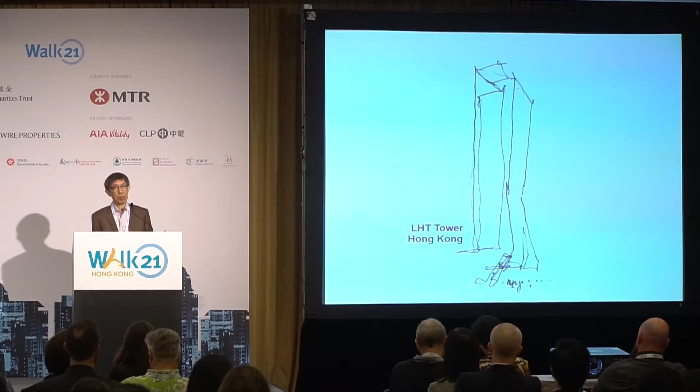One of the simplest ways architecture can engage the walker is just to provide the interface between the private realm, something the architecture contains, and the public realm, something which flanks the architecture, like a street.

In this project, the LHT Tower in Central, it flanks one of the only pedestrianized streets in Hong Kong, Theatre Lane, along here. So what we do is design a facade which is dynamic and engaging, so that from different directions and alleyways, it draws you in.

And when you walk alongside it, the apparent movements and dynamics of the facade actually help you move along. At the same time, it's transparent—you can look at it, through it, to see the lobbies, cafes, and shops on the inside. And it leads you to an entrance which is seamlessly connected to the sidewalk.

So that is a simple example. But architecture could be much more proactive than that.

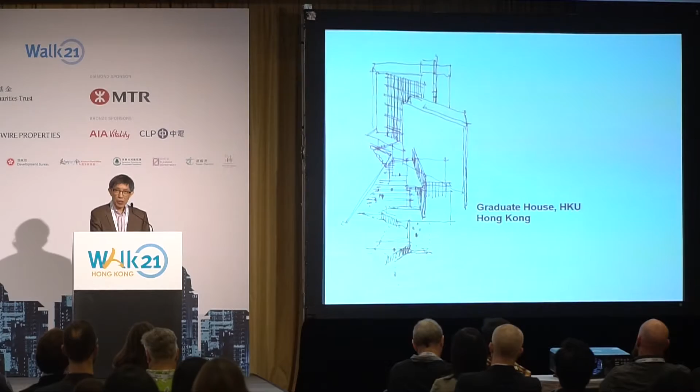A building we designed almost 20 years ago at the University of Hong Kong, in which we actually merge the public realm with the private realm, so that as you walk, you experience the building.

This is the campus of the University of Hong Kong, again a very compact fabric, almost like our city. The building is located there. It's on the route between the residential hostels of graduate students and the senior staff, with the center of the campus down the slope.

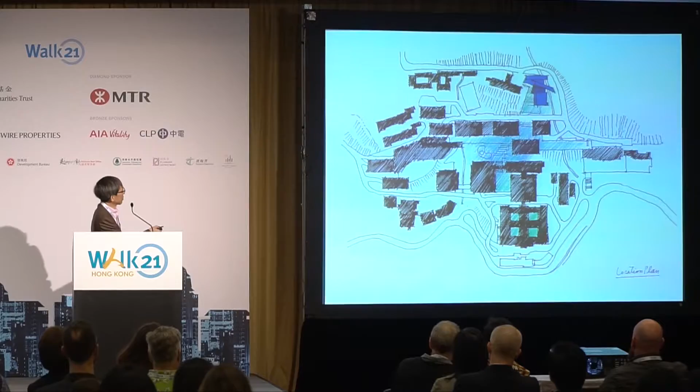So that's the building, the residential quarters of the upper slopes. What we do is bring the routes of the daily commuters from those residences alongside the building, or through the building, on the daily journey to the center of the campus.

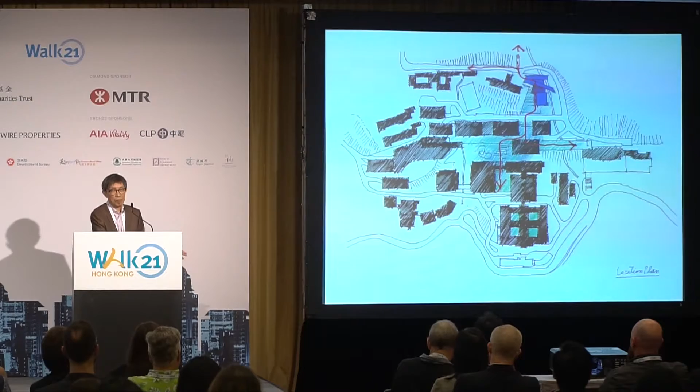That's how the building sits on the slope, with the senior staff quarters and the center of the campus. So you can either walk outside down the steps through the landscape terraces and see what's going on inside, where the podium houses conference facilities and exhibition facilities for the graduate students.

Or you could actually go in if you want, and then you see the lobby of the graduate hostel above, and going down, you see the circulation that links up all the conference facilities with a view of the greenery and the slope outside. And as you walk, you see the scenery on the outside, and people from the outside could see you walking on the inside.

As you pass along, you may come across lounges where student exhibitions might take place, or pass students coming out of lectures from the lecture halls and mingle with them. So it will be an eventful and spontaneous route as you go up and down from your residence to the centers of campus every day.

The other example is a residential building in the old district of Hong Kong. Here, the fabric is dense and vibrant.

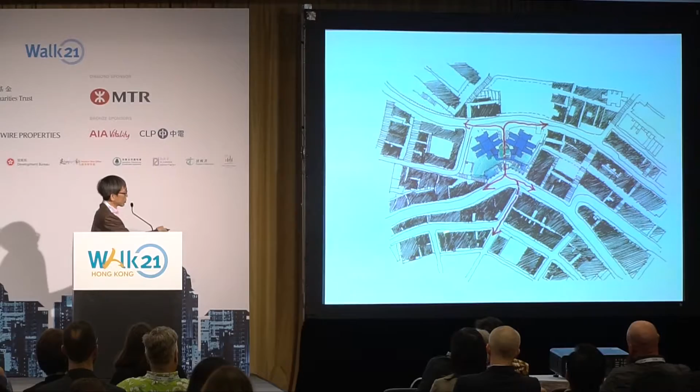So what we do is bring in, again, a route through the architecture, so that there is a journey possible for people not only in the building, but from the neighborhood to go through it to the center of the city to work. Now, this being a residential building, we can't merge the public realm with the private realm, but we intertwine it.

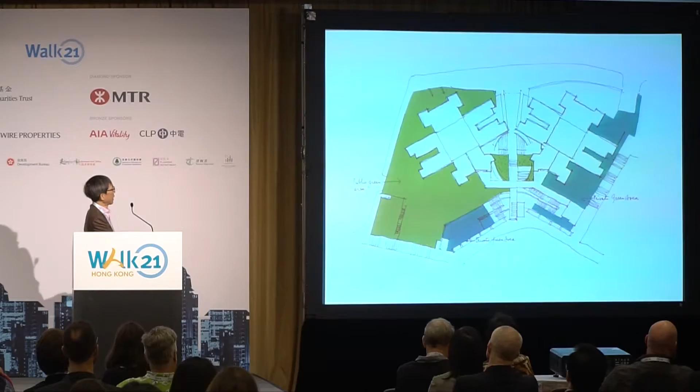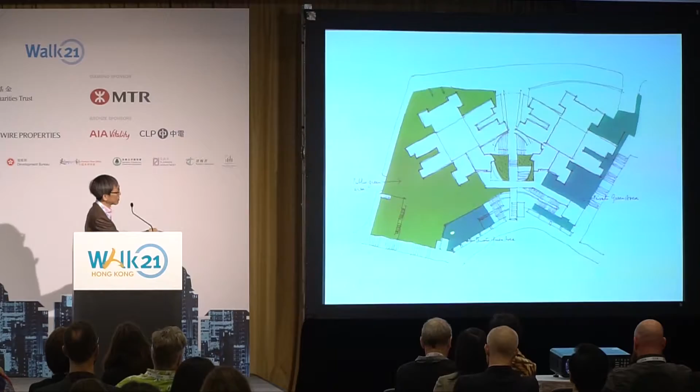And then along the way, we provide open spaces. The light green is a public park available to the residential neighborhood on the back. The dark green are the terraces and playgrounds for the residential towers, accessed through their own internal spaces.

So that is what you see as the podium beneath the two residential towers. That is the public shuttle lift that takes you up, and then through this bridge is connected directly to Hollywood Road behind. You can, of course, take the stairs, but probably you would take the stairs down rather than up. Then there will be the residential lobby and the residential shuttle lift, which is connected to another bridge above the public bridge, feeding directly into the lobbies of the two residential towers. And these are the roof terraces of the clubhouses of the residents, dispersed throughout the podium.

That's what you see looking up. So the public could wait for the lifts here, and then these are stairs that you come down, probably more than going up, as you look up. But as you walk down, or as you go up, you can actually see the city at work. And you can see the terrace, the private terrace, and these are public stairs. Along the way, you have landscaping, greenery along the routes.

And here's the uppermost bridge for the public. Coming out from the lift, you go up the steps and you go straight out to Hollywood Road behind. Above you, there's a private bridge that links up to the private shuttle lift across to the two residential lobbies. On your way, you can look down and you see the landing of the public lift and the public bridge.

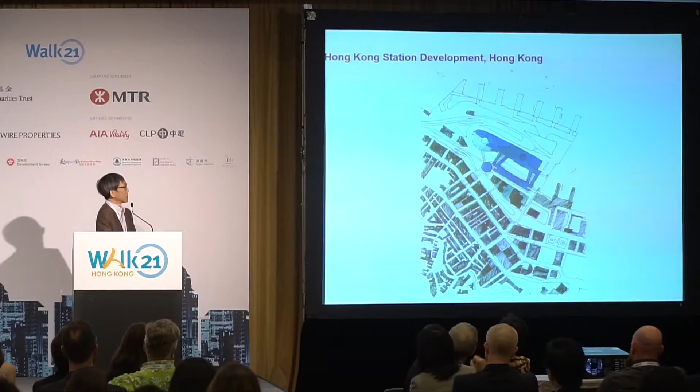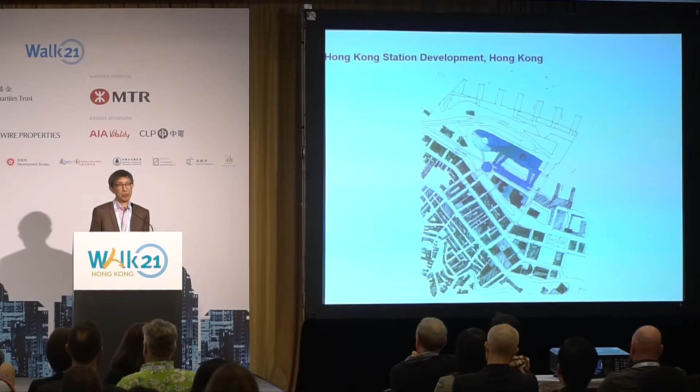IFC in Central, you probably might have heard, is a multi-directional and multi-dimensional matrix, a fusion of the public and the private, right in the heart of Central. That is a complex comprising, visually the most prominent one, IFC Tower, designed by Cesar Pelli, Four Seasons Hotel, shopping arcade, and the airport railway station, for which we are the architects. Before it's built, you can see it's actually a giant piece of a city block that has the potential of linking the south to the north, the city to the waterfront, and from the west to the east.

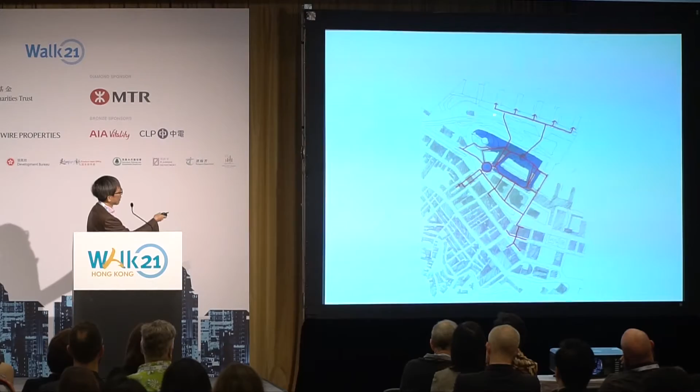The heart of the complex is a complex section of the airport railway station, the Tung Chung station, the transport interchange, the airport stations, check-in hall, the hotels and shopping arcade, the offices. But the key really is the connection of the existing network of pedestrian walkways in Central with what we bring through the complex, all the way to the waterfront, both in a south-north direction and also connecting the east-west connection in Central. So the complex is actually a continuation of the public realm, or the network of the public realm, at one level above ground.

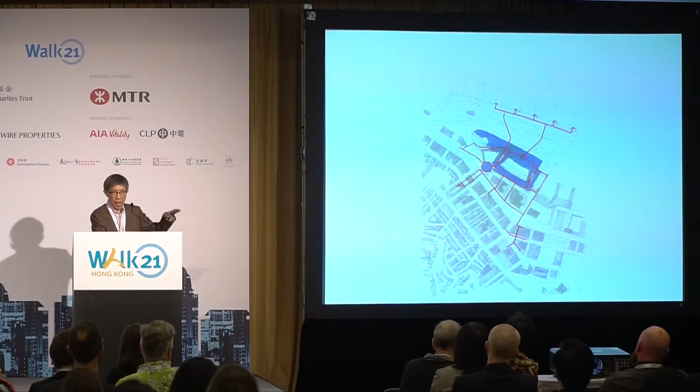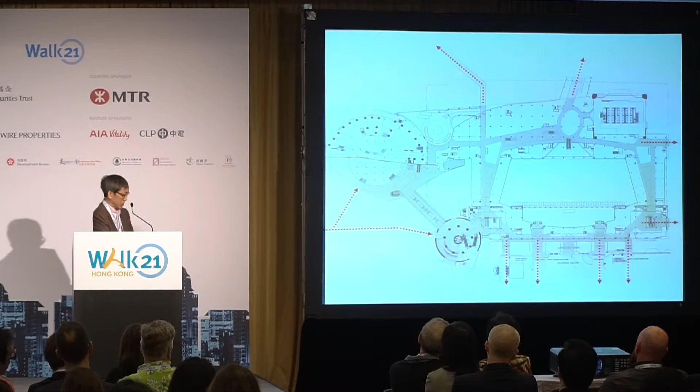That is the plan for that level. And you can see that there are all sorts of entry points and exit points, a highly permeable internal environment. From the west, you see bridges going into the shorter office tower. From the office tower, go to the hotel, Four Seasons, through landscaped roof terraces. From the ferry piers, these are the daily commuters in the morning, going through into the shopping center before going to different destinations in Central. From the south, through the different open spaces provided by Exchange Square, through pedestrian bridges, through these squares, into the inside of the pedestrian network.

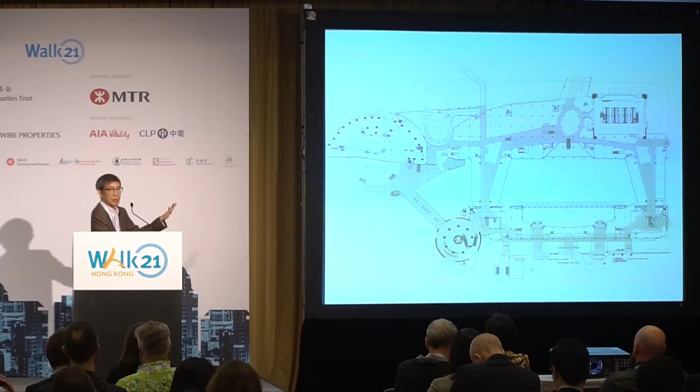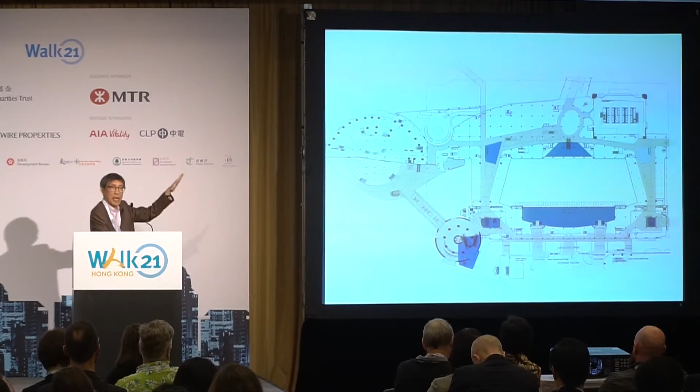Now, the inside is not just an arcade or a network for circulation. There are spaces and nodes on the inside which connect vertically to different functions that you might need to go to. For instance, there is an in-town check-in hall for checking into the airport railway station in the basement. These are the connections within the shopping arcade that bring you up to the lobby of IFC1, the low office tower, or bring you down to the local MTRC line, the Tung Chung line.

Or you bring you through a distributing rotunda and connect it to our mid-level escalator systems going all the way up the mid-levels.

But then there's also, of course, the shopping arcade, doubling up as streets linking east and west. And of course, there are destinations within the shopping center itself that you might want to go to, like the escalators going up to a large landscape deck for enjoyment and relaxation, open to the public 24 hours a day.

So a multi-directional and multi-dimensional matrix mapped onto a private development to enhance convenience, ease, and enjoyment of walking within the city. When we designed the Hong Kong government headquarters a few years ago, we thought that although this is a government headquarters noted for extreme sensitivity to security, there is a chance to improve the connectivity of the city.

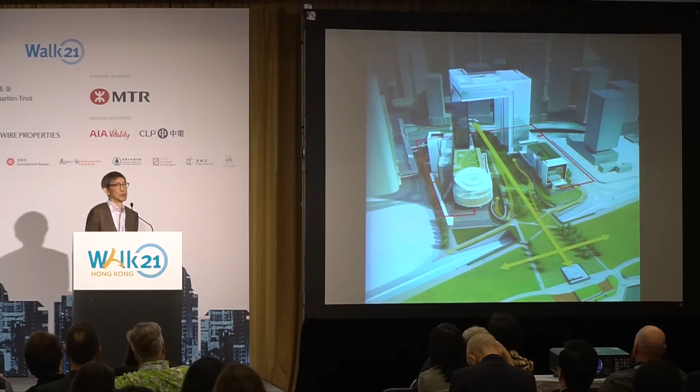As I mentioned, one of the most important functions is LegCo. The other one is the EXCO, where our chief executive works and meets. But the key is this link.

By bringing a landscape deck across Gloucester Road, Harcourt Road, which is a busy thoroughfare, we are able to bring people walk down gradually on a gentle slope towards the waterfront.

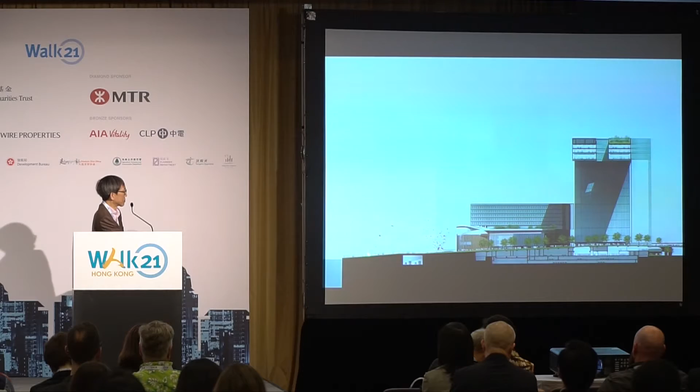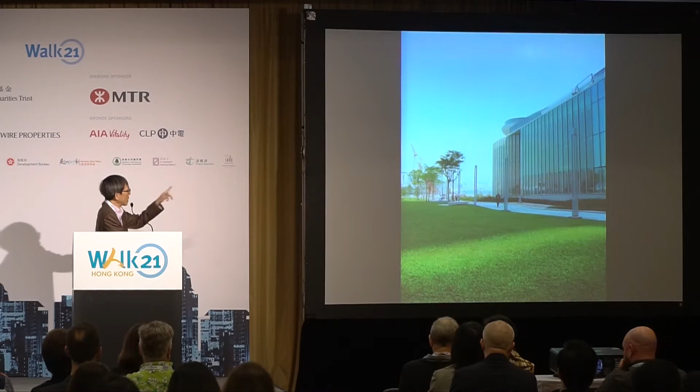So passing through Harcourt Road and walking down, you always see the harbour in front. And you see activities on both sides, the LegCo with its various meetings, and occasionally there could be events staged near the waterfront.

So for the first time, people are able to walk in ceremonial style, not just through narrow footbridges, but in comfort and grandness through the city to the waterfront, while there are pockets of open spaces on either side to provide other different functions.

So the park, it's called Tamar Park, is a place for various activities: simply relaxing, or commuting, always with the harbour in front, or expression of feelings, anxiety, emotions, or solidarity.

So it's a place that expresses the city's different moods, different times of the day, different times of the week, or different times of the year. And when you walk through, you're able to share that mood, be it passionate engagement or romantic tranquility, like this Valentine's Day installation last February.

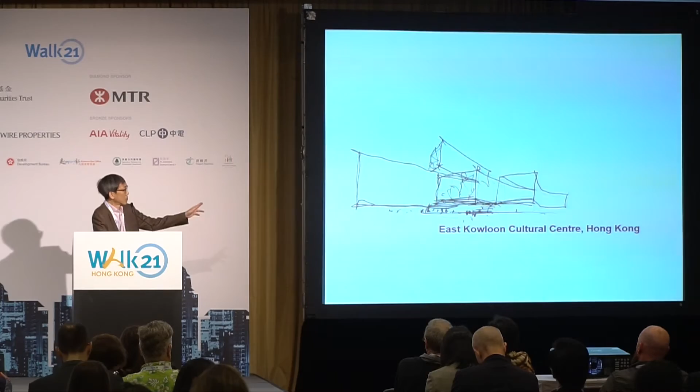Engagement of the walking experience could, of course, also be through contact with art and culture. We're designing this East Kowloon Cultural Center in Kwun Tong, the eastern part of Kowloon Peninsula, and that's what we try to do. The site is sandwiched between new and old residential neighborhoods with an MTR station above ground on one side and a fairly vibrant street-level retail environment on the other side.

So what we want to do is, first of all, of course, to provide the needed residential facilities, cultural facilities, like the 2 theaters and 3 small venues.

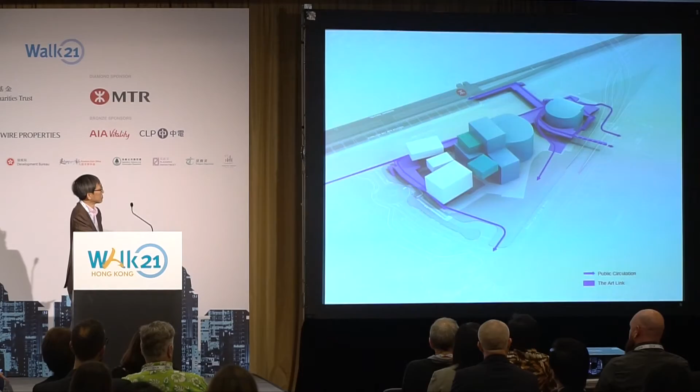But we want to make use of the opportunity to bring people from the MTR station above ground into a link, we call it an art link, around and through the cultural complex, in such a way that it could mingle with the visitors to the center, which is in red. And when that event's going on, again, they could be intertwined, but not actually mixing.

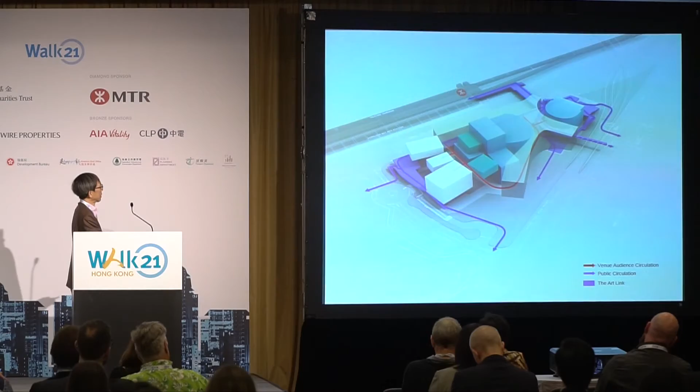And then on this side of the cultural complex, there are at-grade activities that we could provide, and at-grade crossings to the old neighborhood to make it a walkable and more pedestrian-friendly environment.

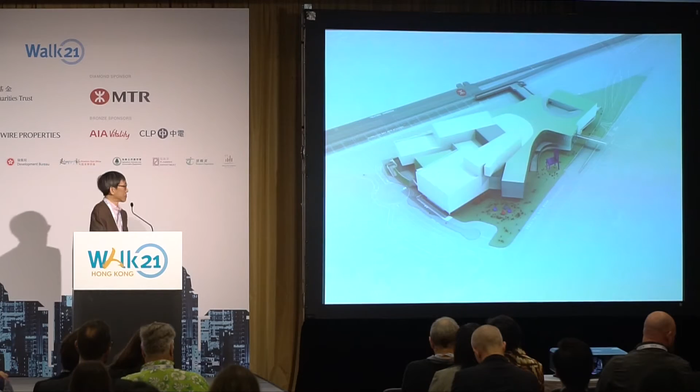So that, of course, is the focus of the center, a 1,200 people theater. But urbanistically, the important part are these spaces, the lobby spaces, which double up as a continuation of the pedestrian network in the neighborhood. So you come in from afar, from the MTR station and the footbridge.

But you could turn right and it leads you through a promenade where there will be art display and art promotion. You could either go through to the housing estate on the other side, or you go up the stairs, and then you go to the different small venues for the community.

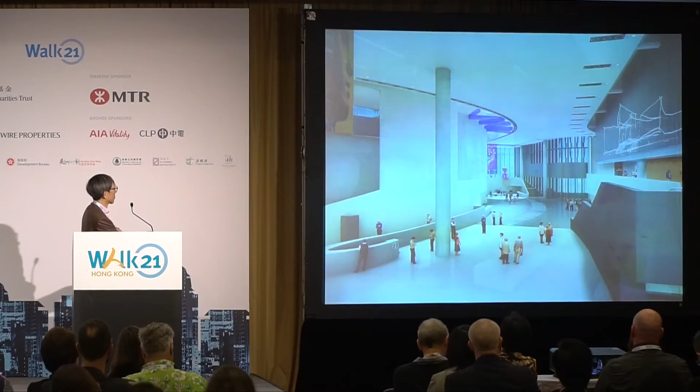Or, this is looking at it from the other side, coming in from the MTR side, you could choose to go down the stairs, and you go through an exhibition space before you go out into the plaza.

Or you could go straight on, up the stairs, and be connected with the footbridge that links you up with the existing retail podium on the other side. Or you turn right and take the stairs and go down onto the plaza where activities, bazaars, and weekend stores, weekend sales could take place.

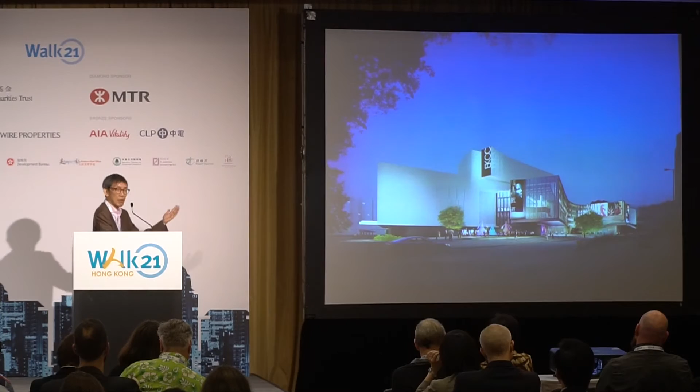It's a scenario which is a win-win, so that a cultural center will not be a white elephant. It will not be dead when there are no concerts or theaters going on. It would always be full of vitality because of its engagement of the community and because it brings commuters through its many spaces almost 24 hours.

Well, not quite, they have to control it, 12 hours a day. But it also enables the commuter or the people who walk through it to be able to come into contact with art, whether they actually want to or not. So this unintentional contact with messages from culture and art over time, we believe, would have a positive effect on the community.

And so finally, a small project which does the same thing, already done. The previous project was one which is under now construction. We'll see whether it will work or not.

But in March, we were asked to design an installation for Art Basel in Hong Kong to exhibit art in a shopping center. And the shopping center is the landmark in Central. Now, there are big challenges of doing that.

And to put art in such a place, you have to compete with pedestrian flow. And then the art would have to compete with the Gucci's and the Harvey Nichols and the Fendi's.

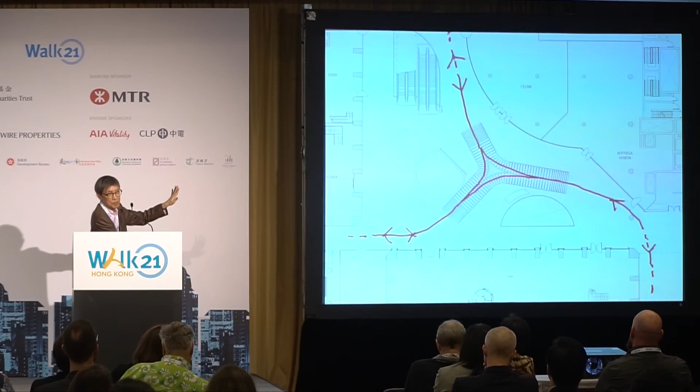So what we could do is to put our exhibition right on top of that route. This won't do because it would just cause clashes between people who are looking at art and people who are actually commuting.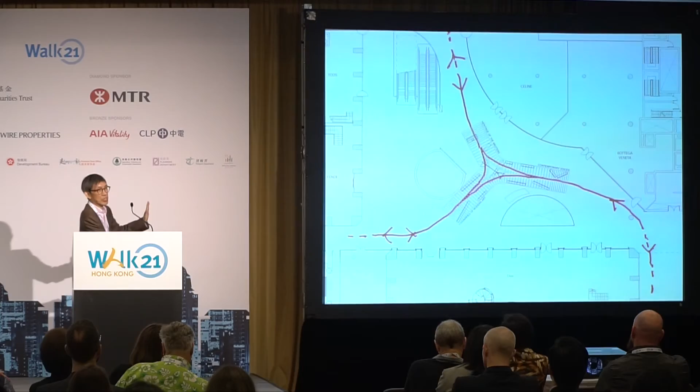So what we actually do is to suspend the exhibits in the air. And that's what it looks like, and that's what we put in.

A floating tunnel suspended in the air in which we put the artwork. And we wrap the tunnel with a translucent membrane so that visually it screens off, to a certain extent, the unnecessary distraction from the merchandise and the shops around.

So instead of looking at art on a wall, as you do in the National Museum, here we created an architectural intervention which allows you to look at art while you are on the move. Something which is very much in the Hong Kong spirit, I think. But it also provides an engagement, something spiritually rewarding, potentially, for your daily walking experience.